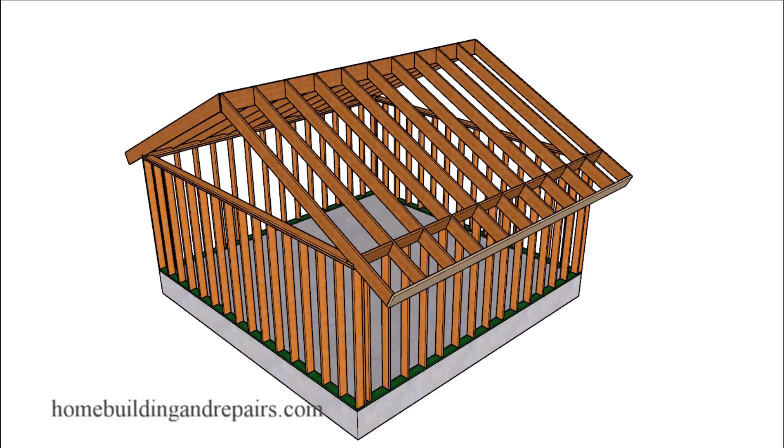In this video, I will provide you with a way to repair the bottom of a conventionally framed roof rafter, one that looks something like this, that might have some damage down here.

The first thing you can do is cut the damaged part out and leave as much of the good wood as you can. If the rafter has termite damage going all the way through, you might want to remove the whole rafter. If not, just cut a section out. If you see termites or wood rot, cut a little further.

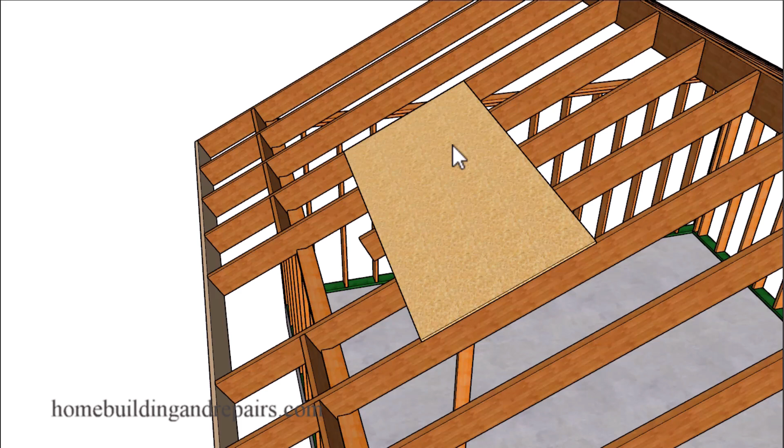You're going to be making this repair with the roof sheathing already installed on the house. You will not be nailing the roof sheathing into the rafter unless you've removed the roofing materials. In some cases, the roof sheathing will hold up the roof rafter, and I've done similar repairs using the roof sheathing alone.

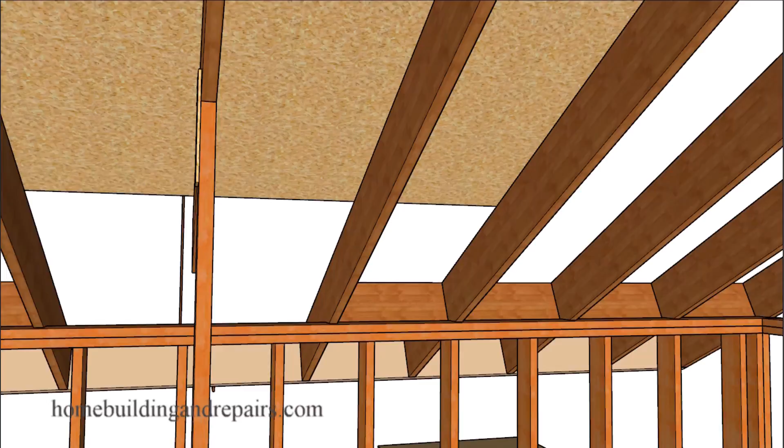If not, put a support board underneath the rafter, maybe a 2x4, 2x6, or even a 4x4, depending on how much weight there is on top of the rafter. It's better to use a stronger board. If you think a 2x6 will work but you're not sure, use a 2x8 or a 4x4.

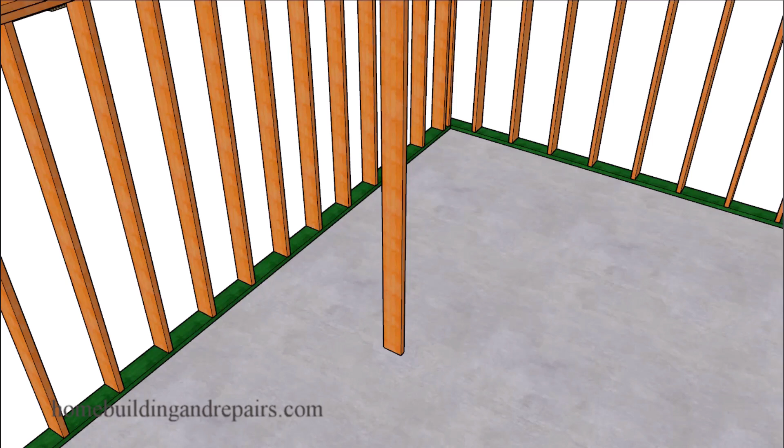Then you can cut the roof rafter and install it on either side of the existing roof rafter. It shouldn't be difficult to figure out the seat cut by measuring from here to here, using one of the other rafters or the section you cut out of the existing rafter to trace the new seat cut. However, if you need more help on that, let me know and I'll make another video.

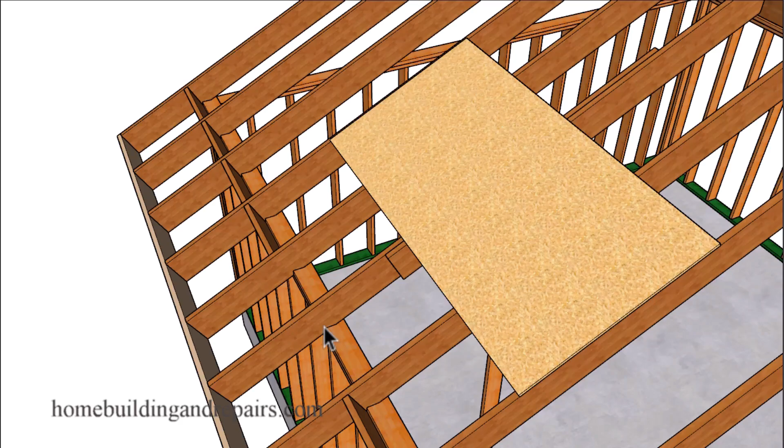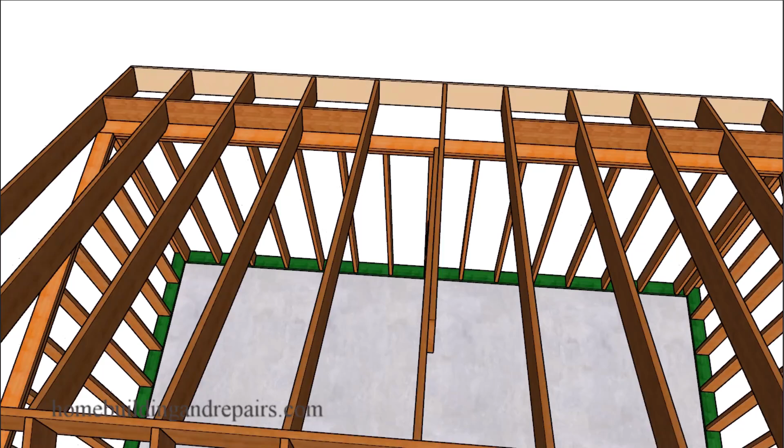Even though I didn't mention it, the blocks on either side of the rafter will need to be removed, because they'll end up a little shorter on one side and longer on the other. If you leave the blocks in, it might make it difficult to install the new roof rafter, since it's going on either side of the existing one.

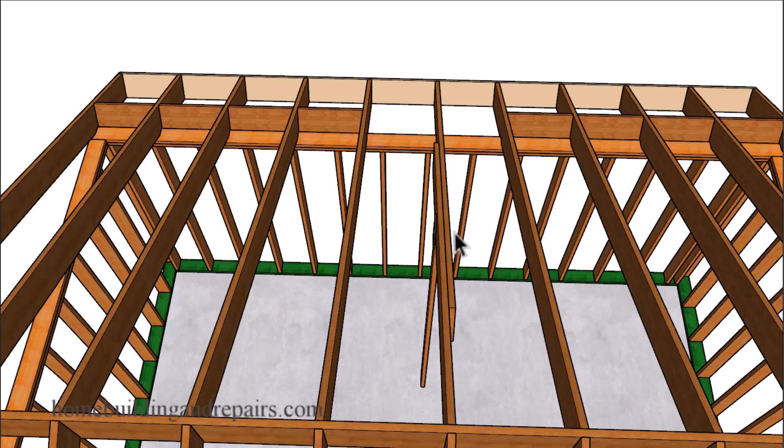Just make sure you don't install any connectors on the side where you're going to install the new rafter. Most of the time you'll need to turn the roof rafter a little, and sometimes you'll need a larger seat cut. I don't think it would be difficult to cut the roof rafter to fit first, then see if it slides in easily.

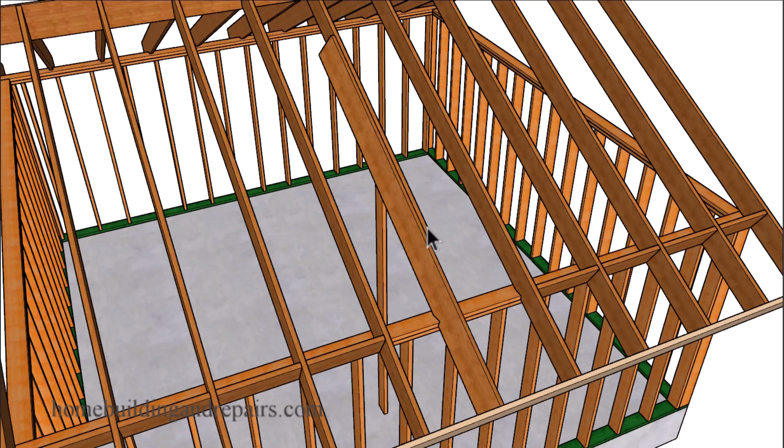If not, you might want to raise the existing roof rafter, or even try to raise some of the other sheathing around the area where the roof rafter needs more room to slide into place, before making the seat cut a little larger.

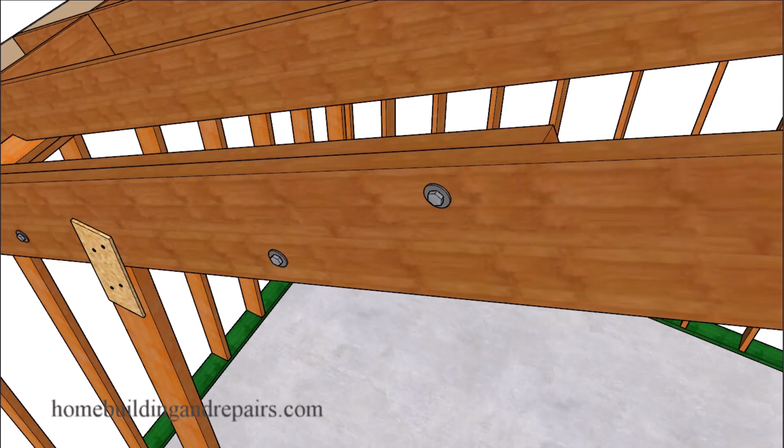After you're done, you can bolt it together. You could probably even nail it together, but for something like this it wouldn't be a bad idea to use some bolts, maybe 3/8 inch bolts, staggered 16 inches on center. Or put a few in, and if it's strong enough, leave it at that.

Keep in mind these are only suggested repair methods and might not work on every project. After that, you can install your blocks, and you can always reuse one of the blocks — that one's going to be shorter.

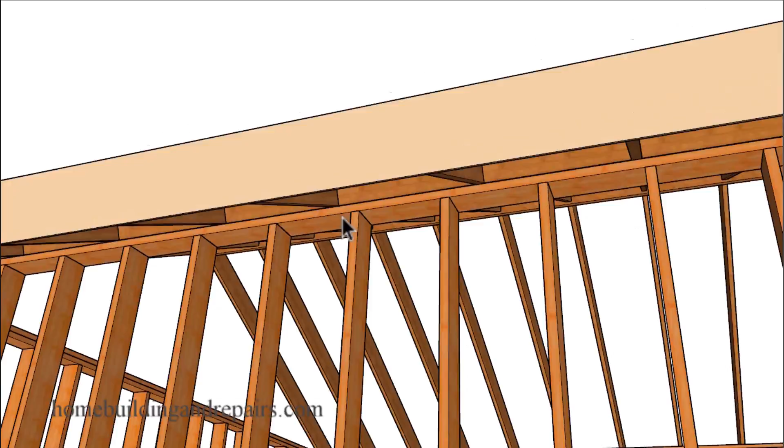There's one more thing you could have a problem with, and that's nailing the roof rafter to the top plate. For example, if you have a 2x4 or 2x6 rafter, it might be difficult to toe-nail the rafter into the top plate.

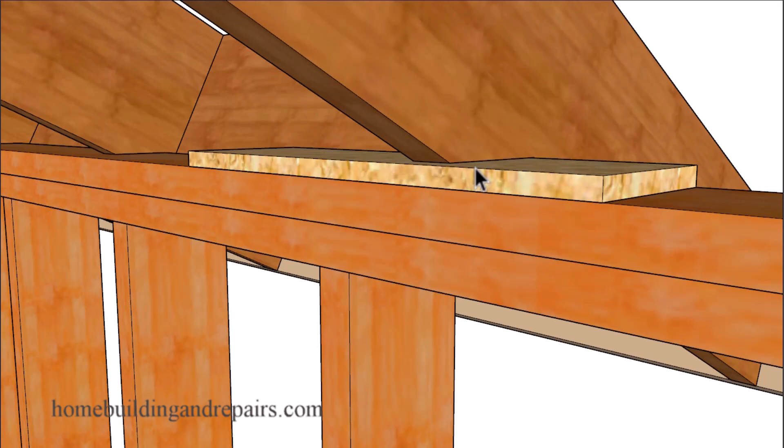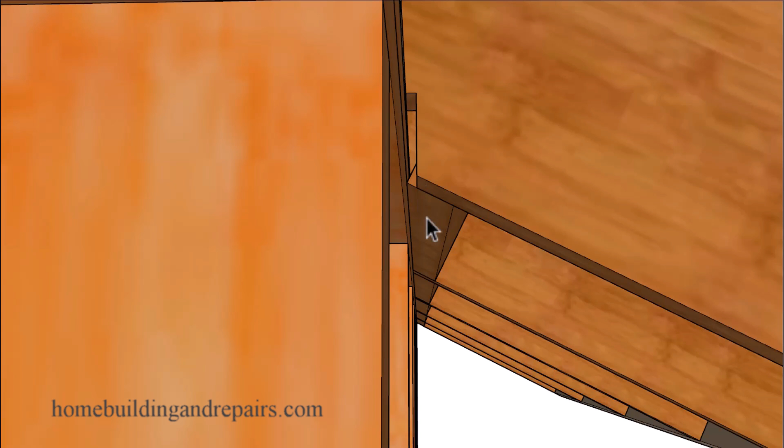An example of a larger seat cut: you simply cut the seat cut maybe a half inch larger, then slide a piece of half-inch plywood in between the roof rafter and your top plate, making this part of the seat cut a little larger. Sometimes your block will cover up the gap here and you won't need to do anything with it. If not, you'll need to fill it with a filler board.

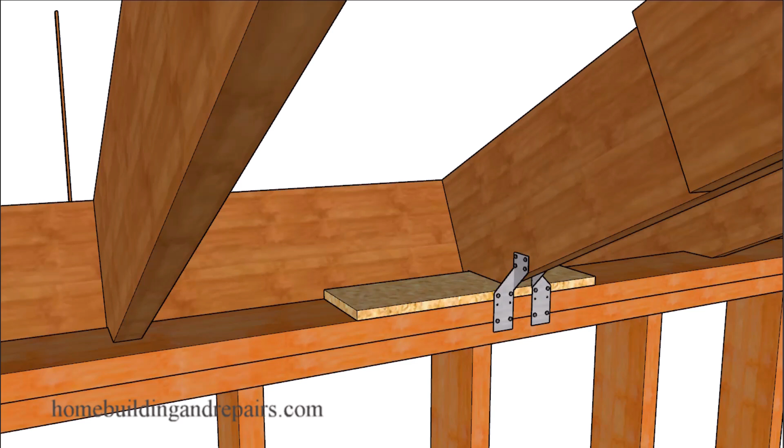And of course, if you cannot nail the top plate, you're going to need to use some type of hardware, which might look something like this. They do have a variety of different connectors you could use to make this part of the repair a little easier.